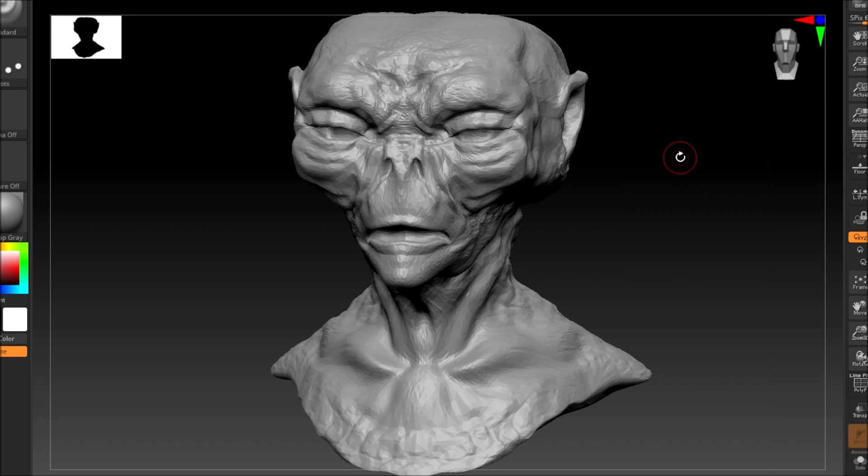Hello everyone, this is part 7 of the 3D printed animatronic creature. Today I'm going to show you me building the gimbal cover, or gimbal base bust, or housing. This is what's going to be holding the turn mechanism for the gimbal, and hold the entire gimbal in place so we can cover it with a chest skin and chest plate. I'll show you the whole process here.

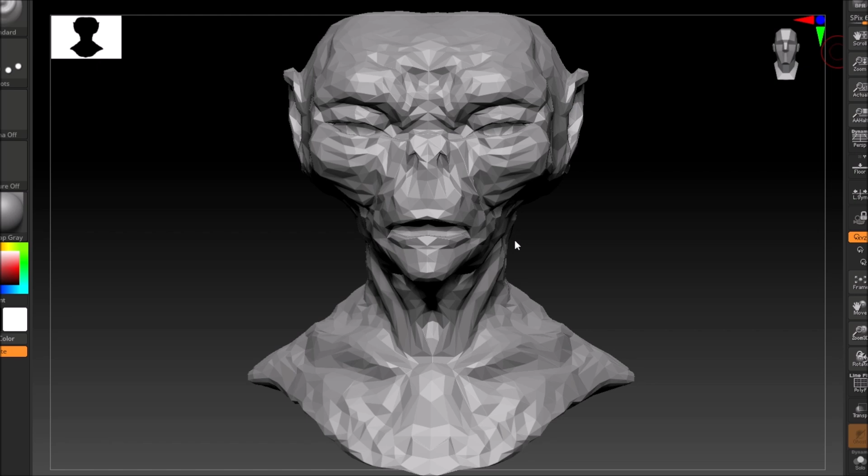In Decimation Master and ZBrush, I was able to reduce the polygons. Then what I do is bring it into ZRemesher, and that cleans up the polygroups as you see here. I'll still want to reduce it further. I don't want it too large, so I try to keep it under 2 megs if I can. But this is what I have.

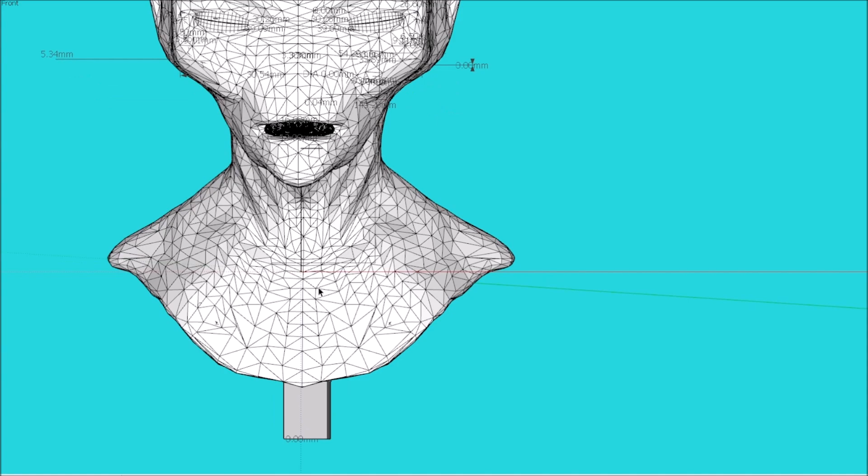Still, I have to make sure everything is centered. That's the key to this whole thing. At the final design of this, what I'm going to be doing is making the bust enclosure, I guess it would be, that holds the gimbal in place and covers it so you can put skin over it.

In that skin area where that plate is, it's going to be glued. What I did here is make a copy of the chin and neck area, or the chest piece, that we're going to be using. So I want to just cut away this chin area and do a slice cut of this whole chin area.

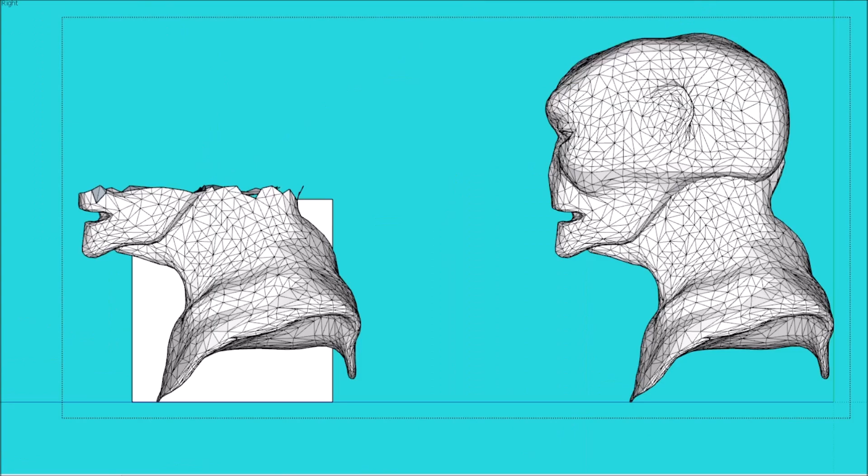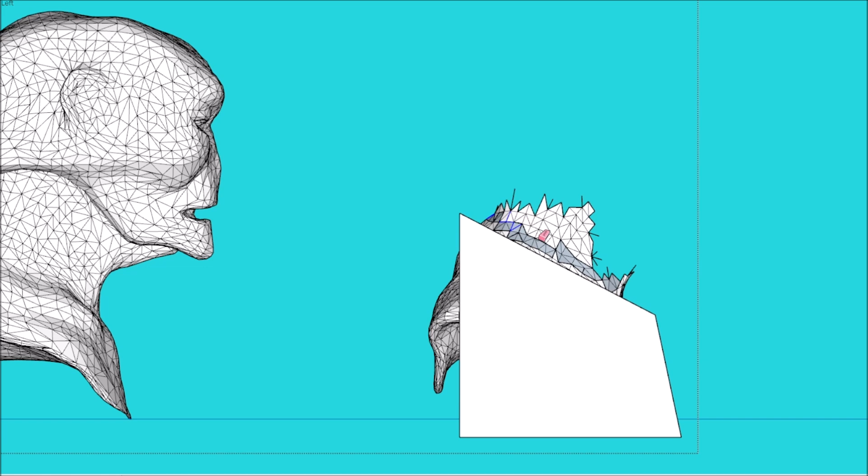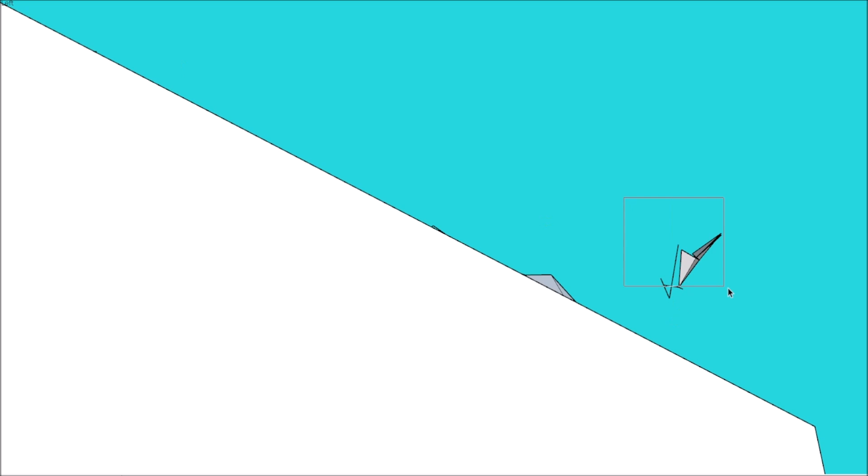Now, later on, this thing I'm designing here is mainly for when the animatronic's finished. There's going to be two more of these: one for the sculpture, and an exact duplicate for the core. Y'all have not seen the core yet. That creature being low poly is probably the closest to the core we're going to see this early in the process. But it's going to be more the shape of the animatronic than you see the creature, blocked out.

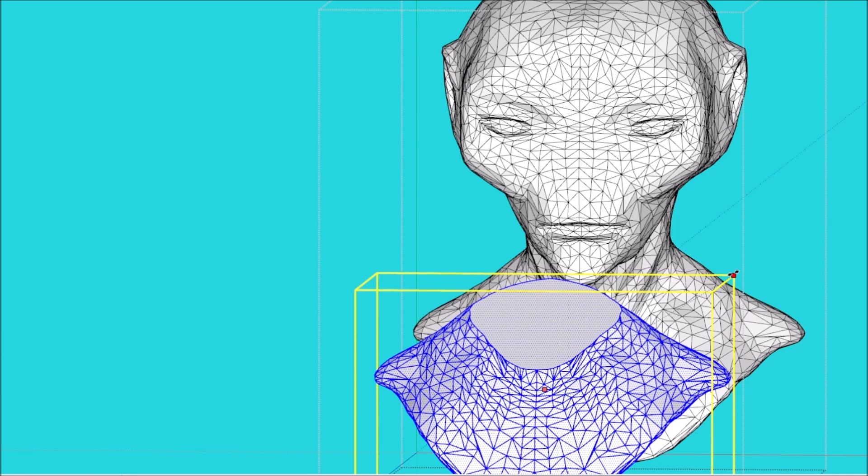This whole base is going to have mold keys in it, and this is the critical part of the whole thing, because when you mold the creature in silicone, those keys are copied into the silicone. Then when you take your core, the core will fit into those keys, so now you have a space generated through the mold. So when we put the silicone in there for the skin, it will make the skin.

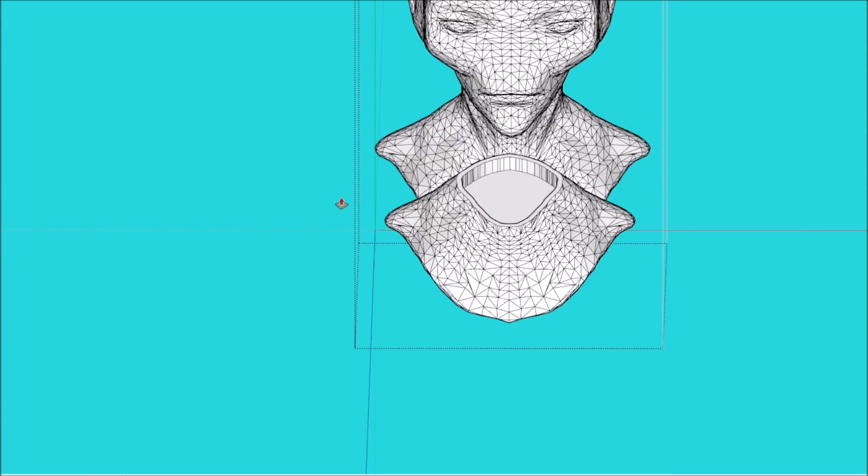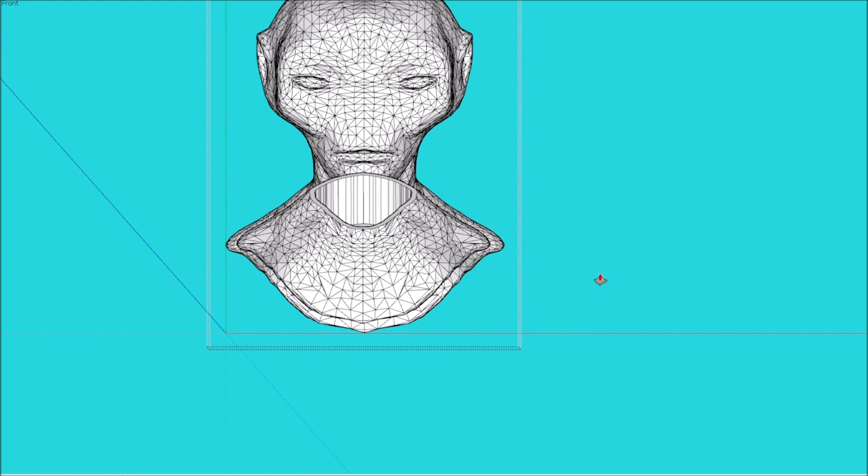Here's where I started designing this so-called chest plate. You'll notice that I had reduced the size of this thing so the skin will lay on top of it. This will be a 3D printed piece later, just so we can put the skin on it. The skin, on the very border of this whole skin area, will be the only thing attached to it. Everything else will be moving freely, just to keep that skin stationary when the head turns left, right, up, and down.

You'll notice the size of it being somewhat smaller, so we can go ahead and generate the skin for the later process, like I just mentioned earlier. But now this is kind of the enclosure part of it.

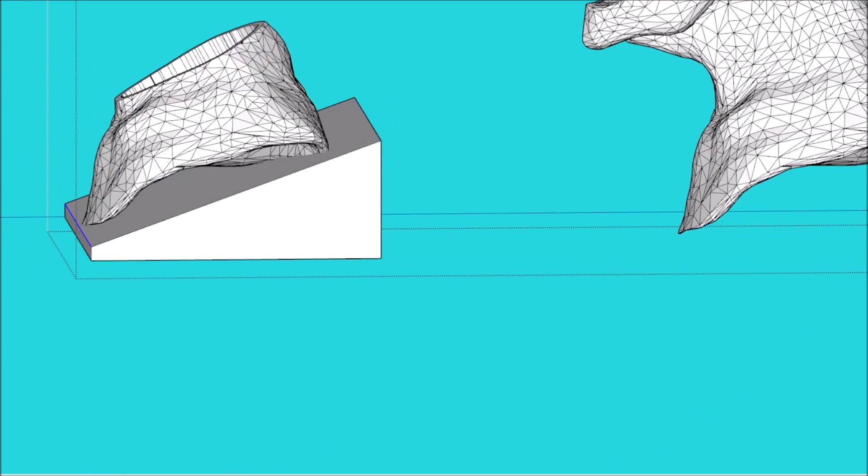All this is going to have to be modeled and edited. Everything underneath this will be removed, and it'll be like a shell of this chest piece on the inside, all smooth and stuff like that.

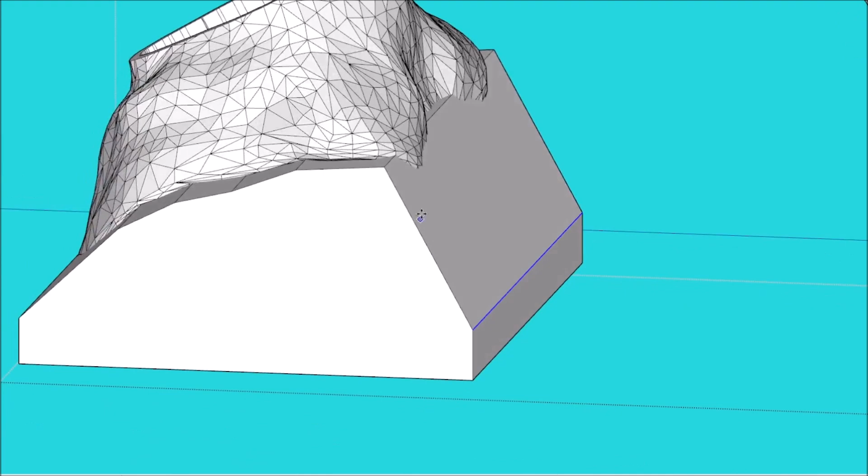So there's clearances, and there's also going to be an access panel. I did make one for the bottom of it, but there's going to be one in the back also, so we can make any kind of adjustments and things like that.

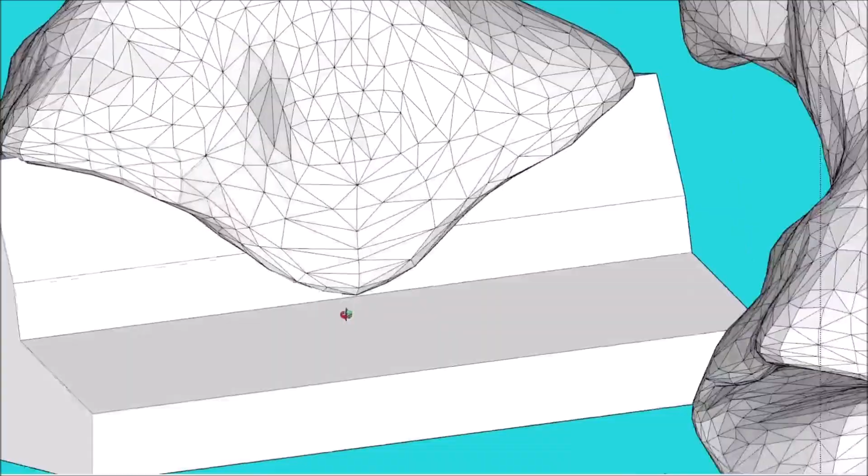If we're going to have a servo controller, it's just the location of that. Like this, the servo block has screw points, and I have to design all that kind of carriage. You could even put another servo in there to move the gimbal back and forth, to make the whole neck move forward and back, like in a seesaw method.

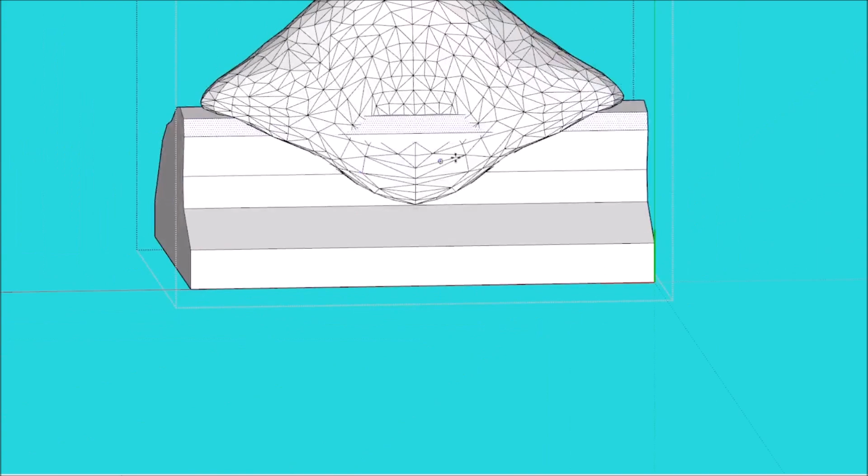Here I'm just basically forming this area around the chest piece, and I have to have clearance for these servos. You'll see later what I had to do, from what y'all seen from the last video, what changes I've had to make.

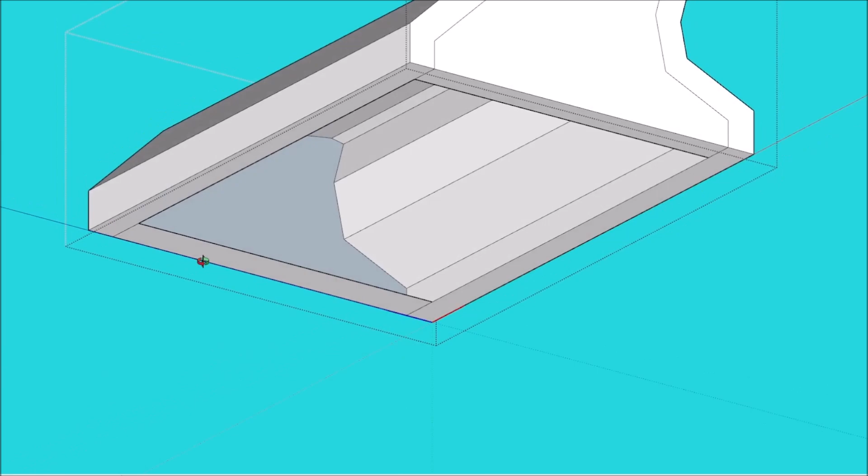Here what I'm doing, I'm just kind of modeling an area so I'll have room for the servo block to rotate, but it's up a little high, and you'll see that later where it's going to be placed. The higher the gimbal, the shorter the linkages from those servos to do the tilt mechanism.

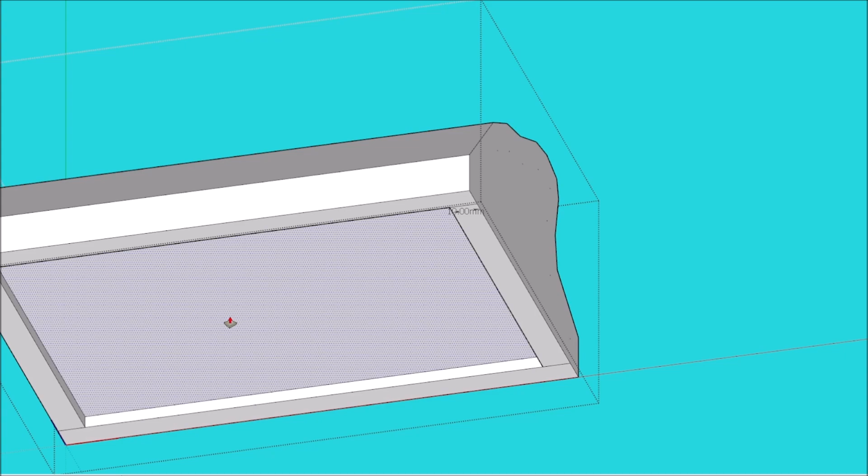But it's just a simple design. This plate right here is just going to be an access panel to where I can work on anything. I could probably pull the gimbal straight from this box, but I'd have to make sure that I have access to all my screw points.

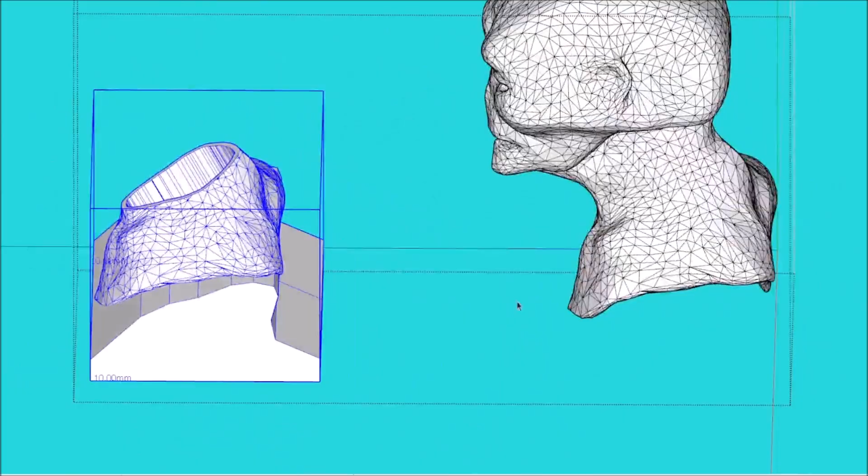But this is a lot of planning for this animatronic. To achieve this realistic movement, it's just a lot of designing and planning, and you test, and if something don't move right, you have to redo it.

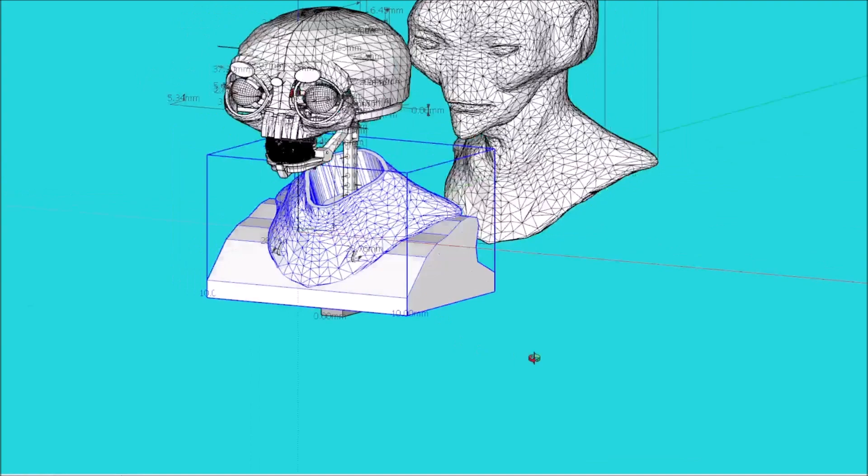But you see here, and this is what I've gotten so far, and this is what it would be like. But you see my servo horns are sticking up or sticking out of the skin, so now I know that it's not enough room. So now I got to make adjustments, and this is how I made the adjustments.

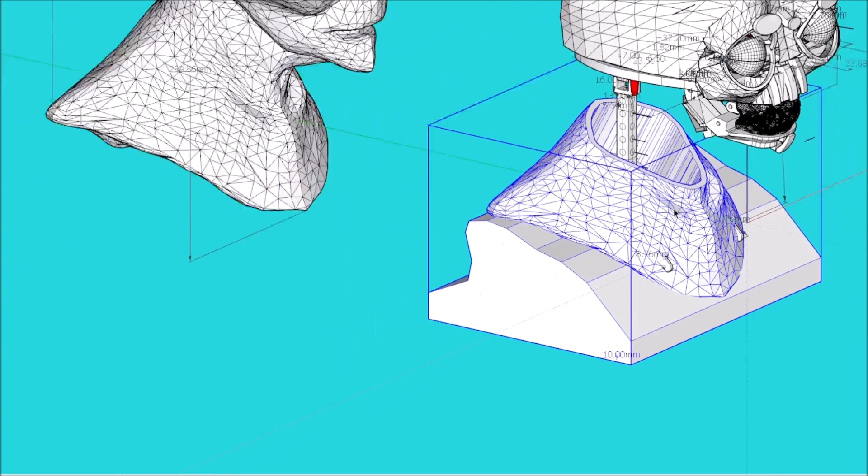So what I do here is I'm going to bring up the gimbal, and you'll see where the servos are, and the servos show those so-called servo arms, and that controls the linkages. Well, if they're sticking out there, I got to manipulate this.

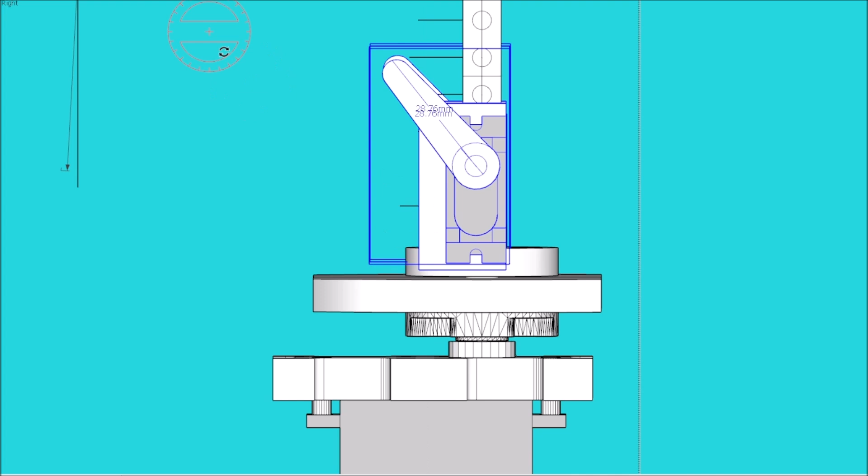So what I'm going to do is I'm going to invert these so they're up, and I'll be able to mount them on this aluminum beam, and I'm just trying to work out all the problems.

And you see now I've generated some area to work with, and these servos are small, but they're end to end. They are considered micro servos, but they're on the wide side, and they're heavy.

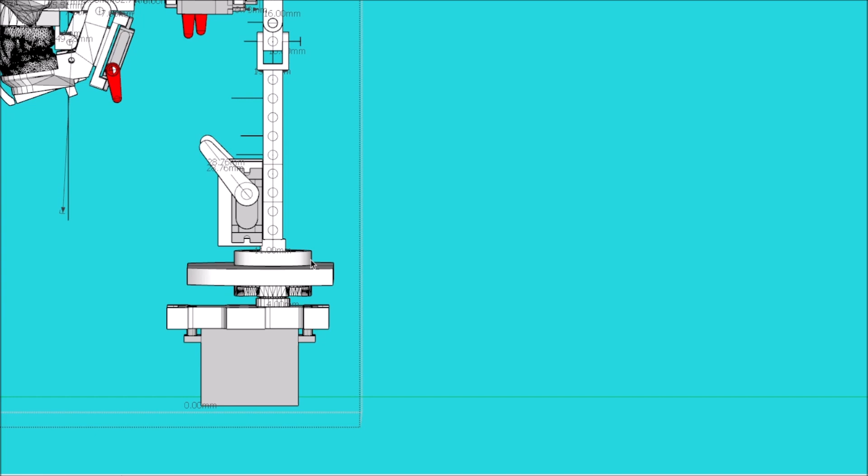They'll lift heavy torque. So what I'm going to do here is I'm going to remove that so-called spin table because I won't need it. Once again, I'm just going to mount it on this beam.

But what I'm going to do is, instead of having a 9-hole aluminum beam, I'm going to go with a 7-hole aluminum beam. So I put this circle,

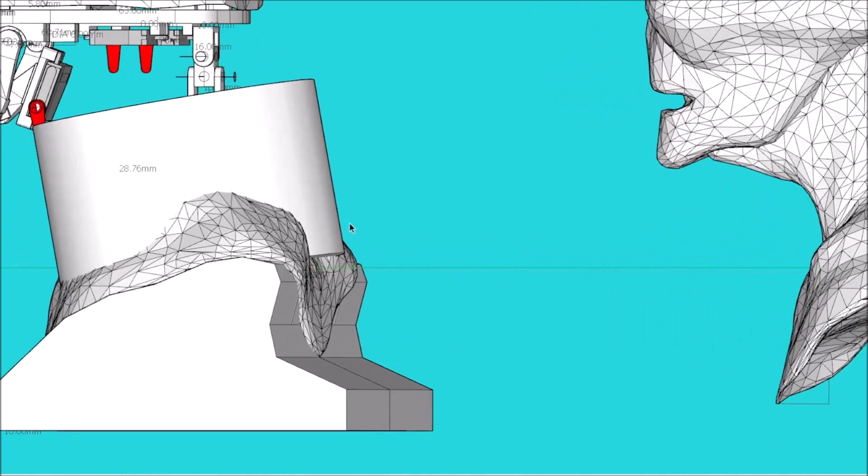this so-called cylinder around this. This way I can see some kind of clearance area, as you see here.

This will, when this rotates, this will show me clearances that I have for these, because these servos will be spinning, and they have to be there, and they have to spin with it.

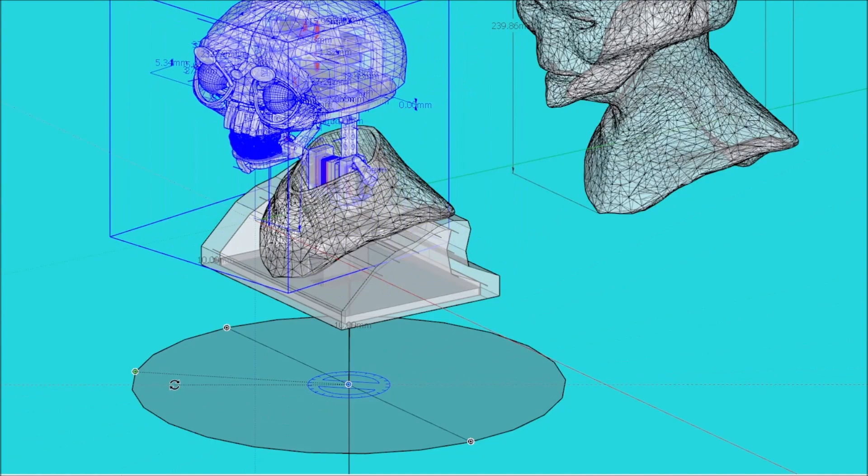You can put them separate, as you see here, but it's still too large. So I got to the point where, to save even more space, we're going to design another servo.

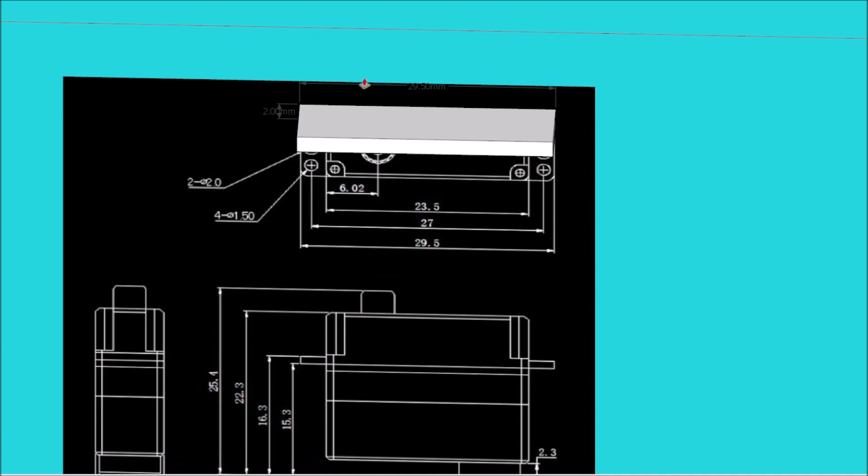So I'm just going to eliminate all the headache and worry and try to figure that out. So I went on to King Max again, and I got a schematic of another wing servo, but these so-called screw points are horizontal instead of vertical.

So that way they're thin, and they're pretty strong. And I just did the research, and I searched through a few of their wing servos, and I found one that had a pretty decent torque, but not a whole lot of torque.

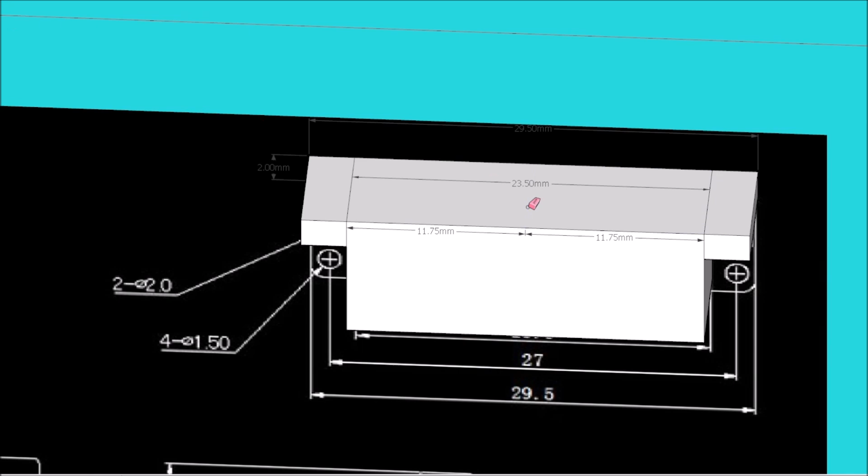It don't need to be lifting 40 pounds. It only needs to lift maybe a pound. And that's overkill because this thing is small.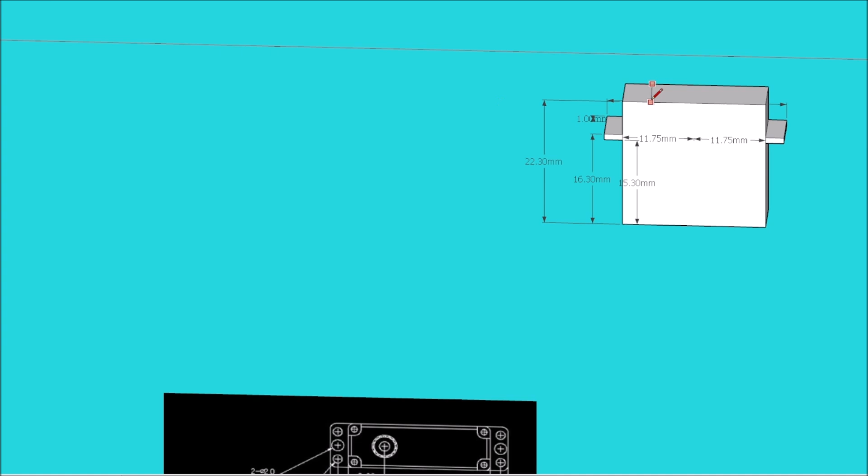But you got to realize that I will be lifting or rotating about 8 servos in the head plus the skin. So what I'm going to do is I'm just going to go by this schematic right here and draw out this servo, just a quick, easy reference. And it's accurate because I'm just following the schematic measurements.

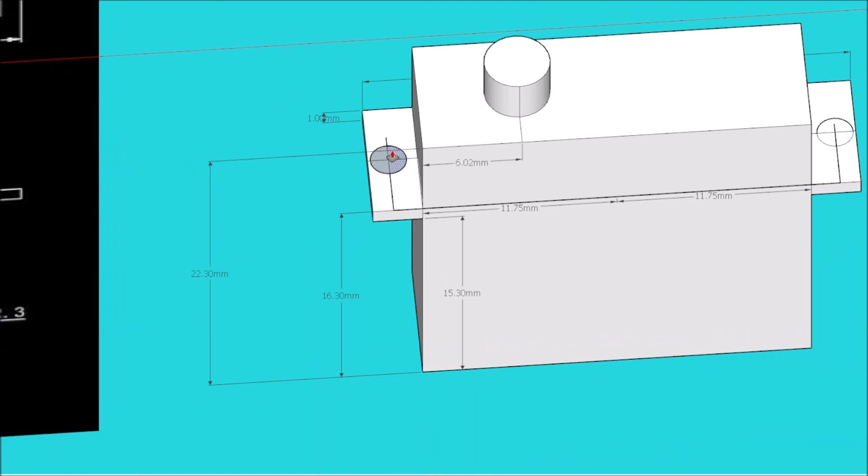Now, I like servos a lot, and animatronics, it's a passion. And I go in there and search and do research for the servos and which one to use. But everything is a measurement, and by having a library of these servos, you can know what sizes to use.

And it's a perfect demonstration of what we're dealing with now. The servos that I had in there, I couldn't put them any other way. It's just that way. But I'm going to show you what I did with these servos, and I think you're going to like it.

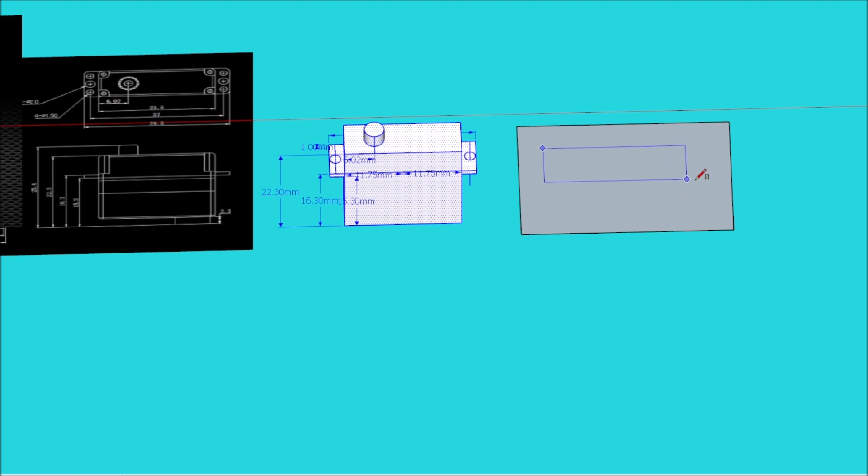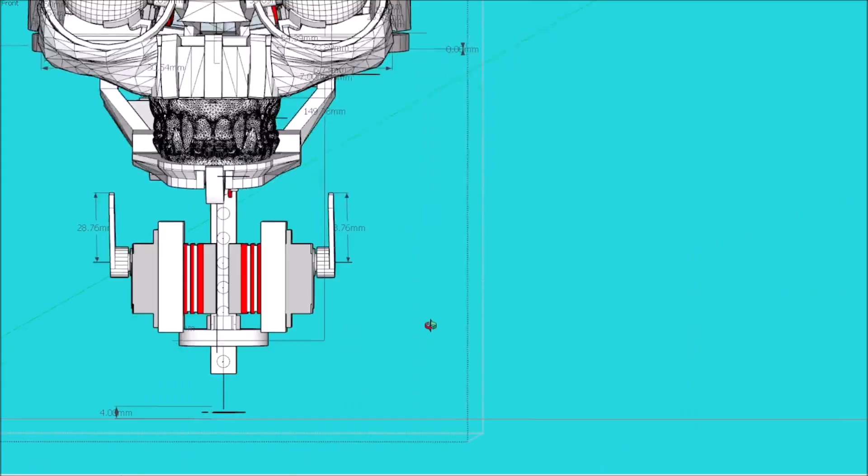After I design the servo, I'm going to make a servo block. But I'll set this up a little different than the other one. Instead of bottom to bottom, since this is half the thickness of the other servos, I'm going to invert one and have the other the other way, so I have left and right sandwiched together. You'll see how much space I've saved already.

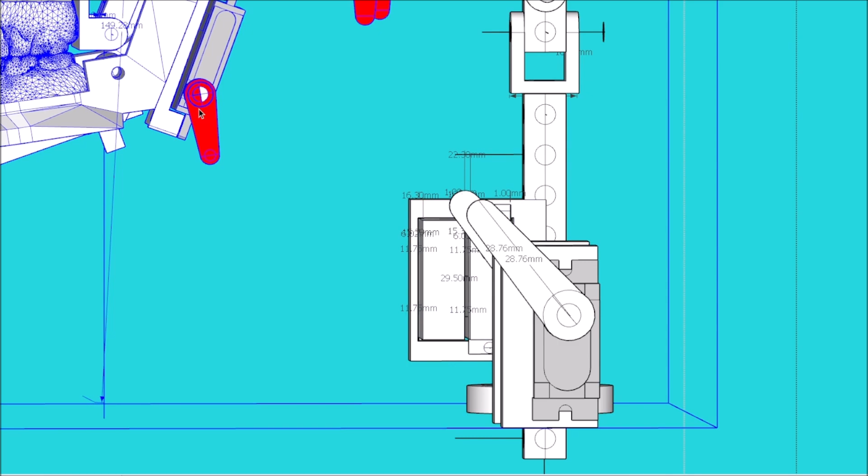This will narrow the so-called linkage area. I'll place this on that same beam, and I may lower the beam back down to a 9, but we'll see and I'll demonstrate it. Here I'll just copy a horn off this other servo and place it right onto this one, because these horns match the same size.

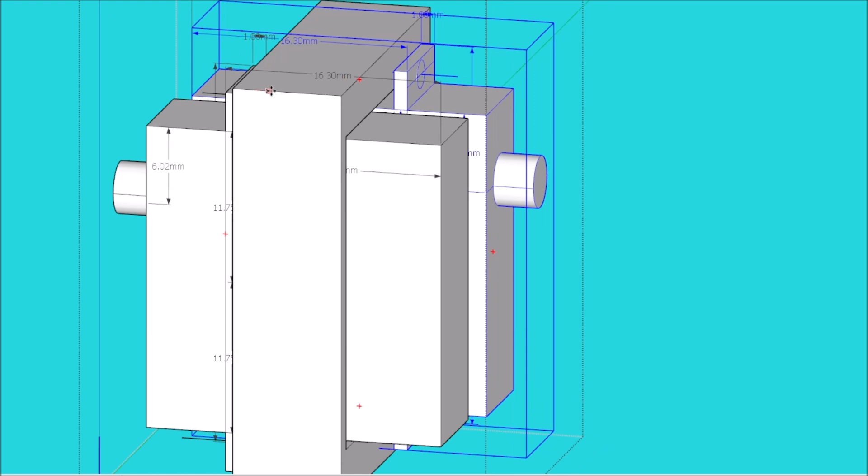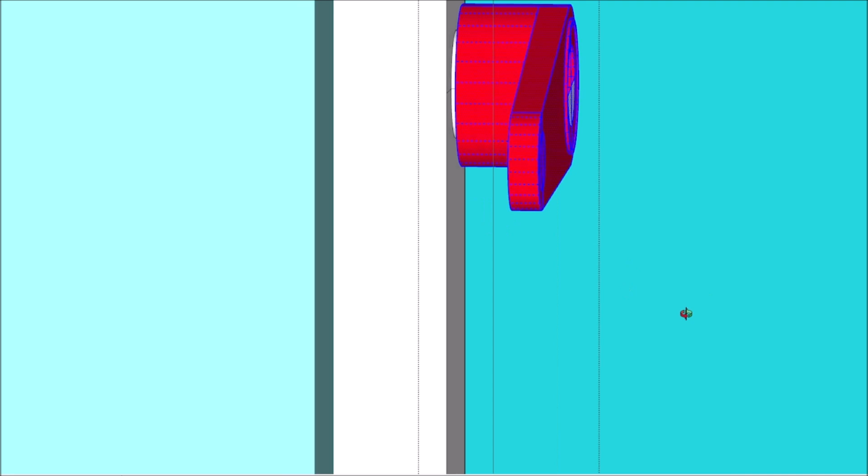On the schematic, I'd say 99% of servo schematics out there, you'll rarely see one with the horns on the servo design, the schematic itself. I wish they would do that, because you need to know the height of the servo horn on the servo, since that gives you the correct measurement for where your linkage is going to be. I don't truly know that until I put the screw inside the servo, mount the servo horn, and measure it with a caliper.

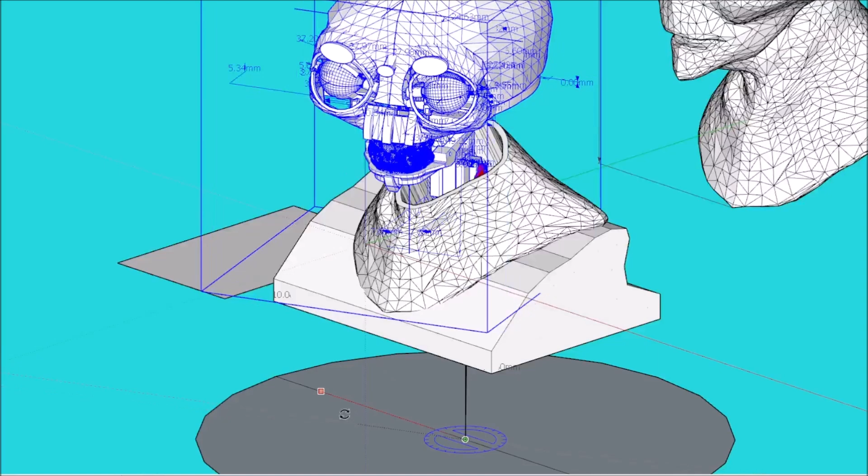It's one of those things - I guess I should have done this first, and that way I wouldn't have had any problem. But you see the clearances I have. It's not going to be moving 180 degrees, this creature's not. It's just going to be maybe a 70 degree range, but I think this is going to work well. What do y'all think?

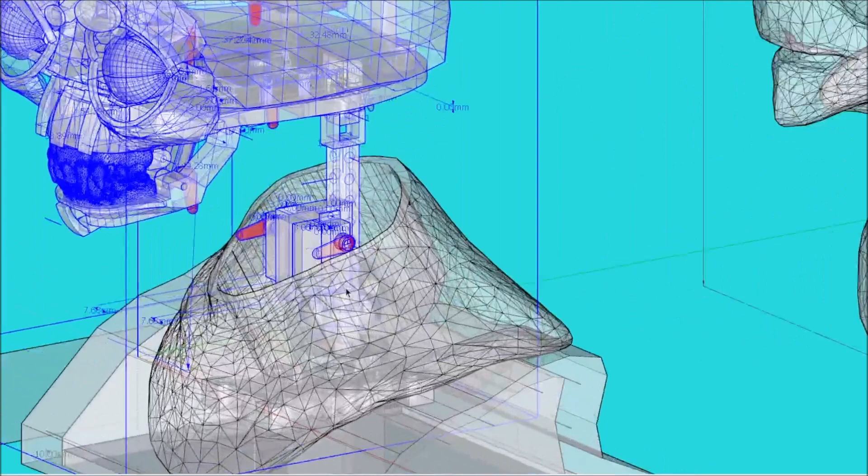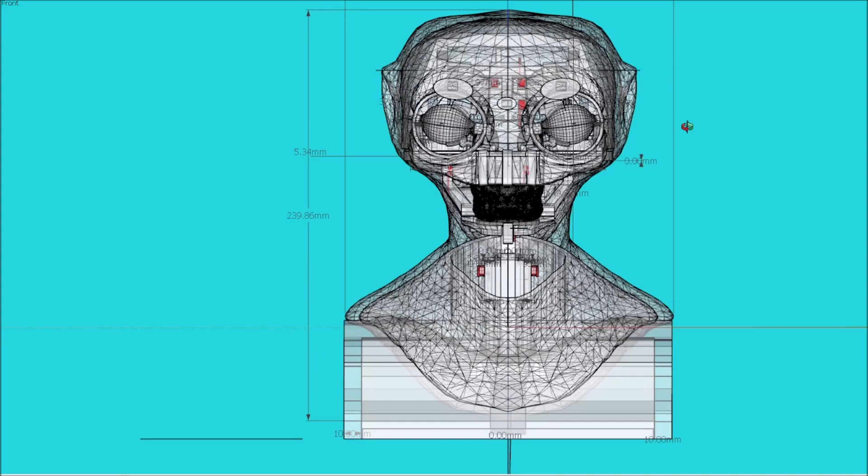Now we're going to take a look at X-ray, and you can see how everything's going to be mounted, and you see the servo block on the bottom there. This way I can work things out and figure location for the servo controller, where it will need to be, kind of design the so-called openings so I can have everything laid out correctly. You can see a good profile look, and it turned out well.

I'm happy with this. This is the start of getting close to where I can begin finalization on all these parts. But it's coming along.

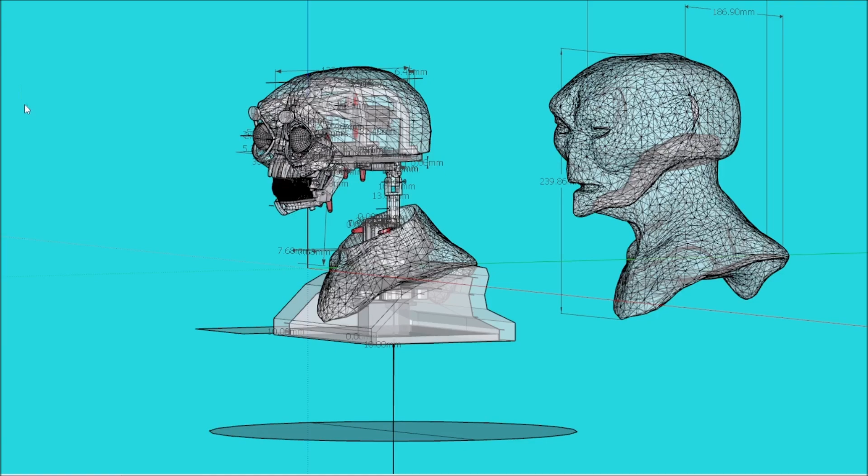I'm going to pop this skin on, then remove the skin again and make an STL file of the animatronic. Then I'm going to import it into ZBrush, and we're going to put the skin on this, and do some studies to see how it's going to look with the skin on, and see it in an x-ray version.

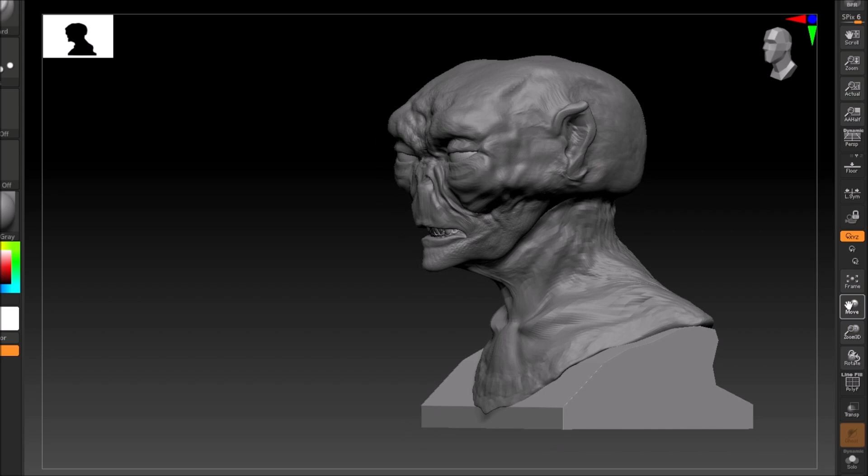You know, it's fun. This whole video was 2.5 hours of recorded work, but it's what I like doing, and we'll get this animatronic up and running with skin on, and it's just fun. I want y'all to be part of it.